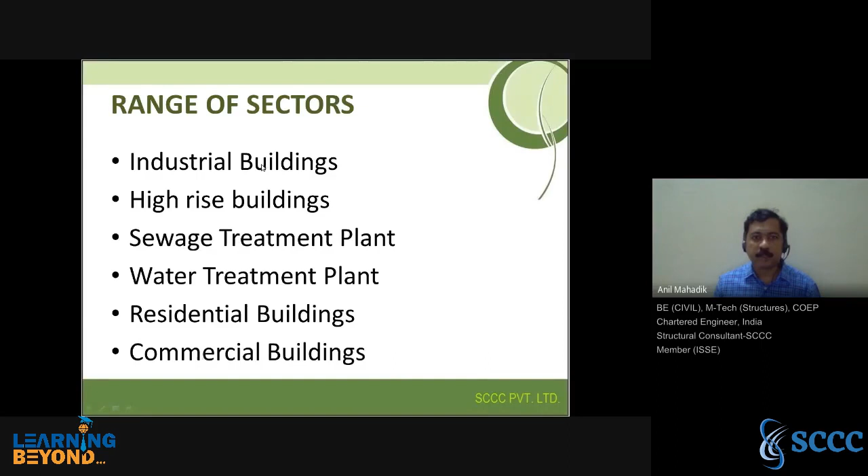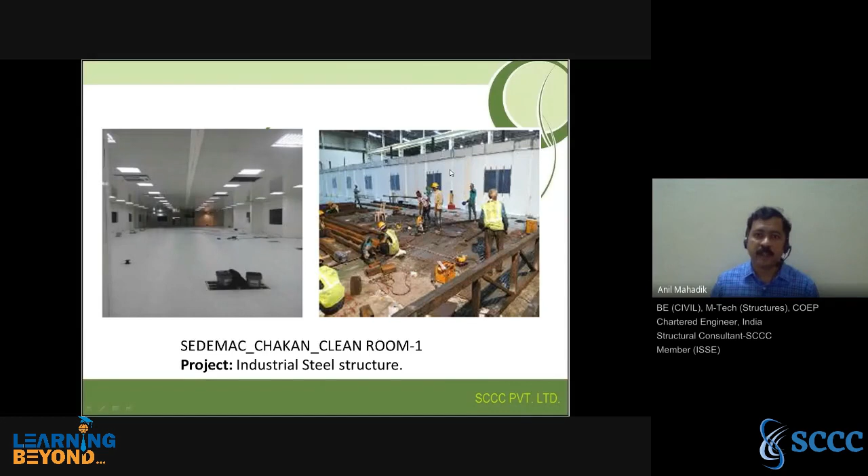These are required for electronics companies, where we have to do the interior part for the clean room structure. Clean room means a dust-proof room with an air-conditioned system inside, generally used for robotic operations. For these structures, we also need the fabrication supporting structure, which we design as well. So these are the projects we did.

This is one project where we did value engineering for the client. It was the same client, but through value engineering we saved around 25% cost for the client, and we finished the project about 20 days earlier than planned. So these are a few projects we had done.

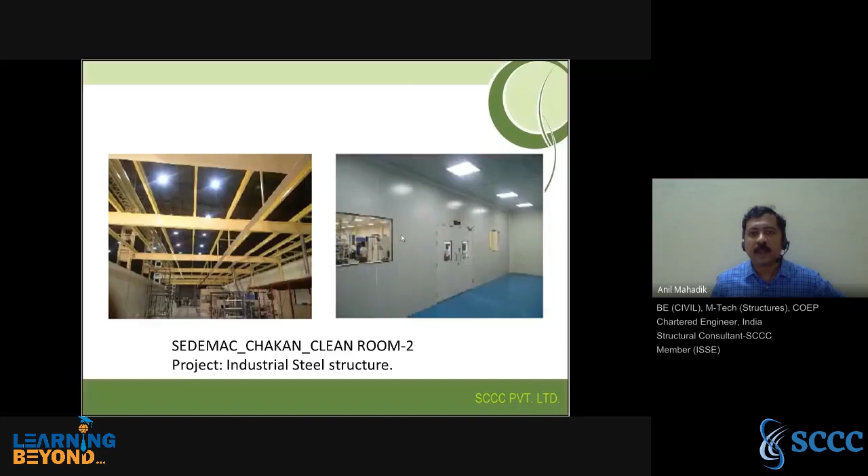We gave suggestions for strengthening and retrofitting this plant, which comprises different structures like warehouses, administration buildings, manufacturing units, foundations, etc. We gave certain solutions to the client. This client was expecting to put a solar system above the roof of the warehouse, so we gave them a solution because the roof was not able to take those loads. We provided retrofitting solutions accordingly.

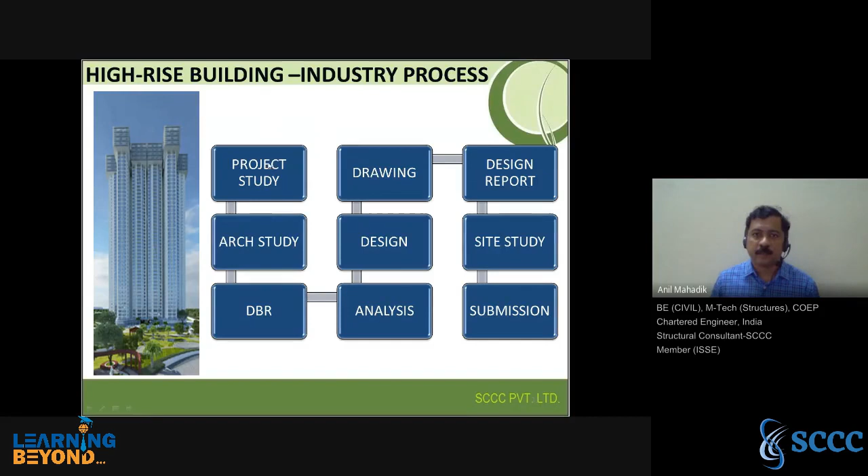Now this is the industry process. There is a certain process which is followed in the industry, so as per the industry process, we will have a training program. We know we'll just start with this project study.

First comes the project study. We have to do the project study, background information, geotechnical study, then contour survey study. This is the first part which comes while designing any high-rise building or any project.

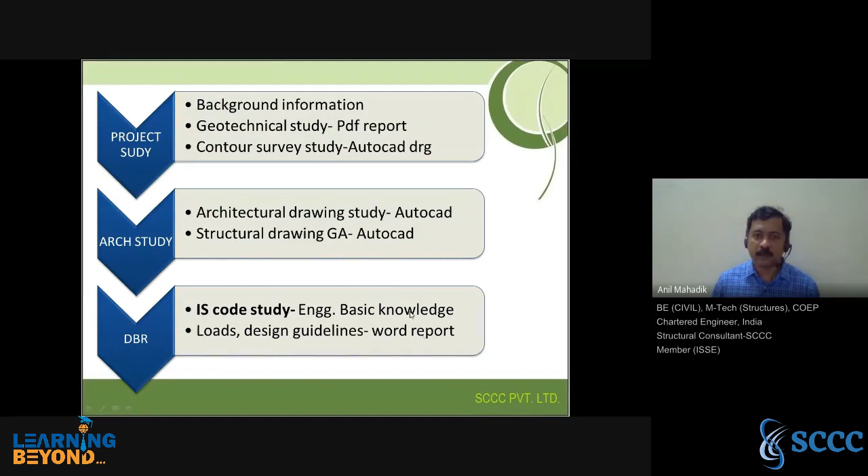Then we have to study the architectural drawings, which are generally prepared in AutoCAD. Then we have to prepare the structural drawings also, general arrangement drawings. And then we have to do the design basis report, where we study the IS code, loads, or whatever engineering basic knowledge is covered here.

Then comes the analysis by ETABS. In analysis by ETABS, we will cover gravity analysis, then earthquake methods like static and response spectrum analysis, then P-delta analysis and pushover analysis. All this will be covered in our program by ETABS.

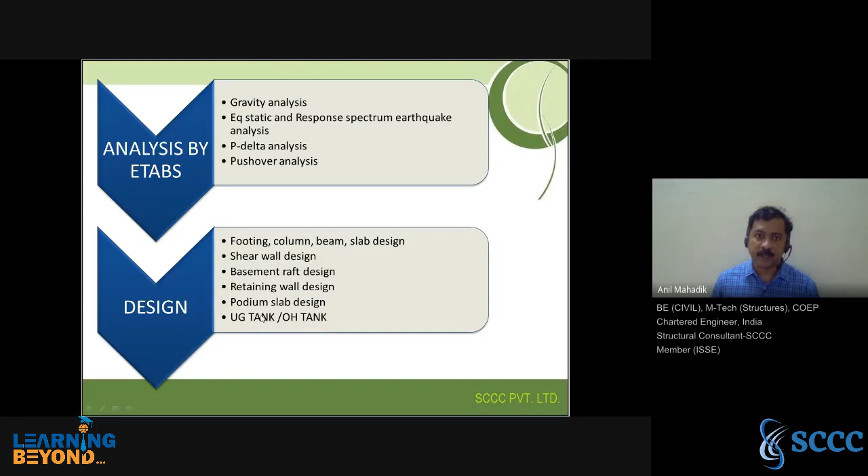Then we have to design the structure like footing, columns, beams, shear walls, basement - all these podium slabs, underground tanks. This will also be covered in the building.

Then we will have the structural drawings, practical drawings for this building. So the complete project will be done, and you will be supposed to do the project drawings also for this, including the earthquake detailing part, IS 13920.

Finally, we have to prepare the design report, calculation and design report. We will do this at the end, and also cover whatever site concerns there are - how to check the reinforcement and what are the site issues. All this will be discussed in high-rise building.

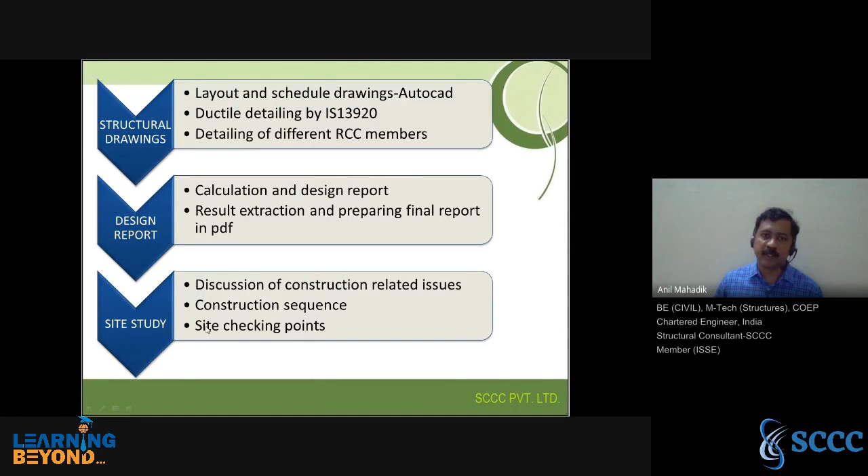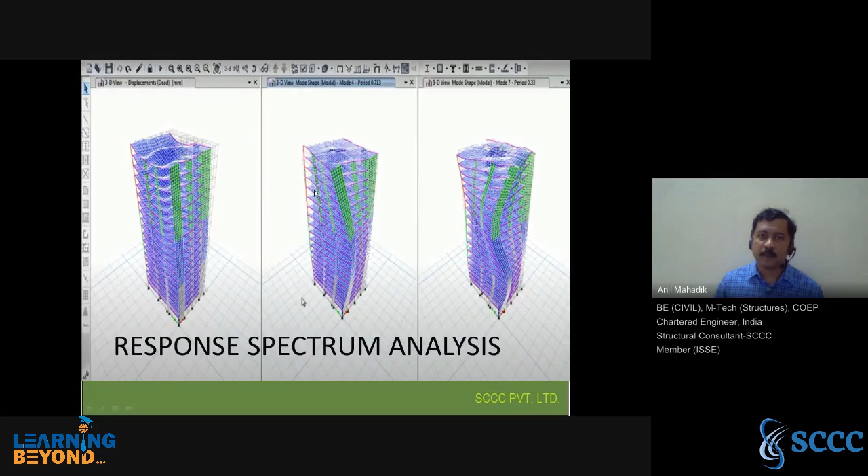This is one example of modal response spectrum analysis, which is dynamic analysis - you must be knowing this. This is vibration analysis of high-rise buildings. That part will be covered also in our program, whatever basic knowledge is required will be discussed here. So these are a few mode shapes, vibrational modes.

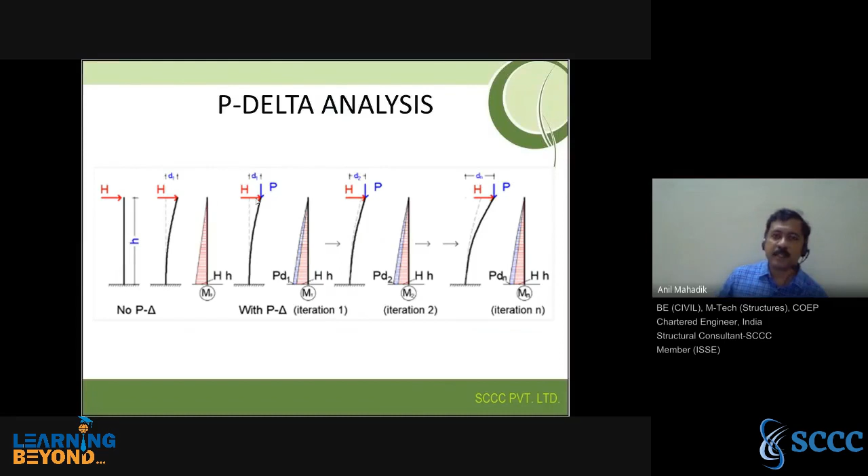And as we know, for high-rise buildings, we need to go with the P-delta analysis.

So we will cover the P delta analysis also in our program. Then we will take an example of a commercial high-rise building as per British codes, by Dubai or Abu Dhabi standard. In that also we will have the same process whatever I just discussed for our Indian high-rise building. The only difference will be that British codes are used for design of RCC elements, and UBC and ASCE is used for earthquake analysis and P delta analysis.

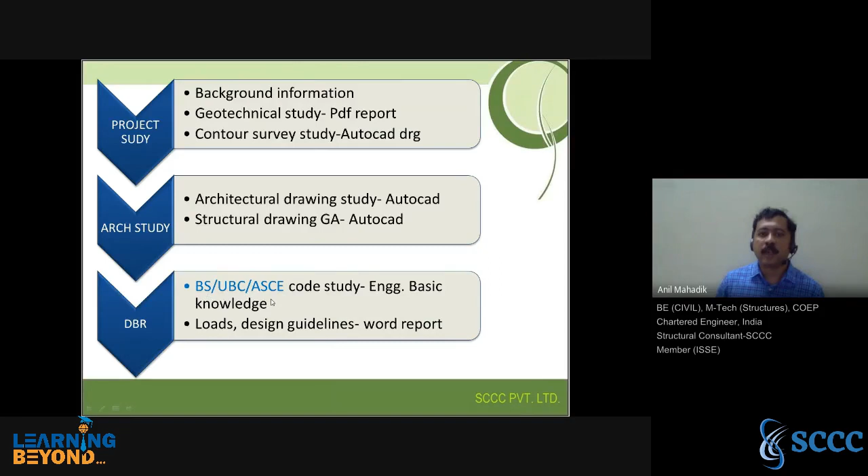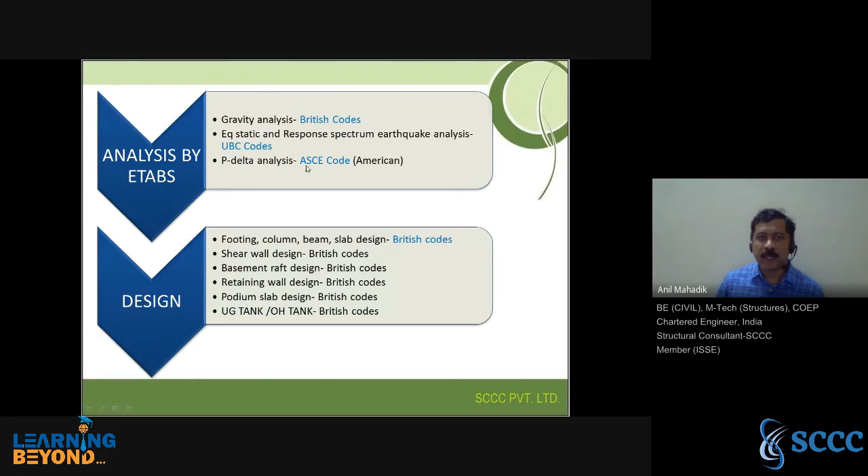So that part will be covered in our course, and we will use the ETABS software for that. The only difference is British codes and UBC and ASCE codes. So similarly here for the design, and the drawings also we will cover, structural drawings. And finally, Dubai and Muscat guidelines.

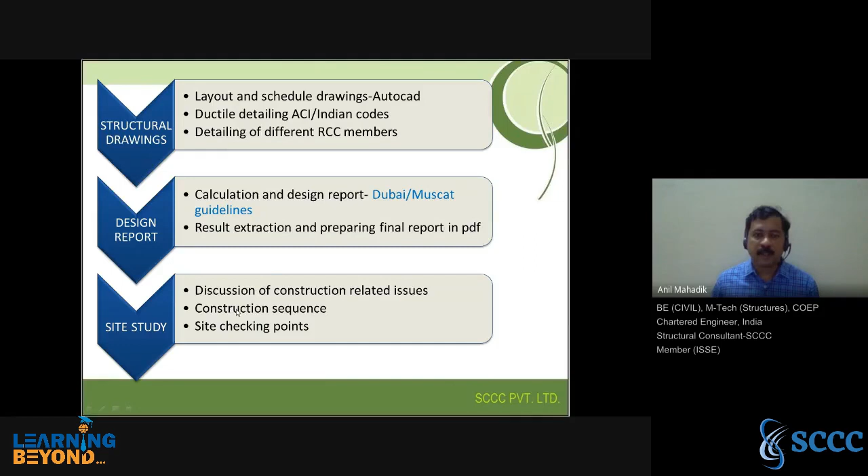These are very important if somebody is interested in Middle East projects. So this will also be discussed, how the Dubai or Muscat municipality has their guidelines and what they expect from you in the design report. So that will be discussed. And definitely site study, we will have some few bungalow projects also in our program. Then we will take the residential apartment projects also.

Second sector comes the sewage treatment plant sector, where you may be knowing that it is having different structures in this plant. So we will cover this total plant in our design and actual project. These are the clarifiers, aeration tanks, admin buildings, then pump stations. So all these structures are included in STP.

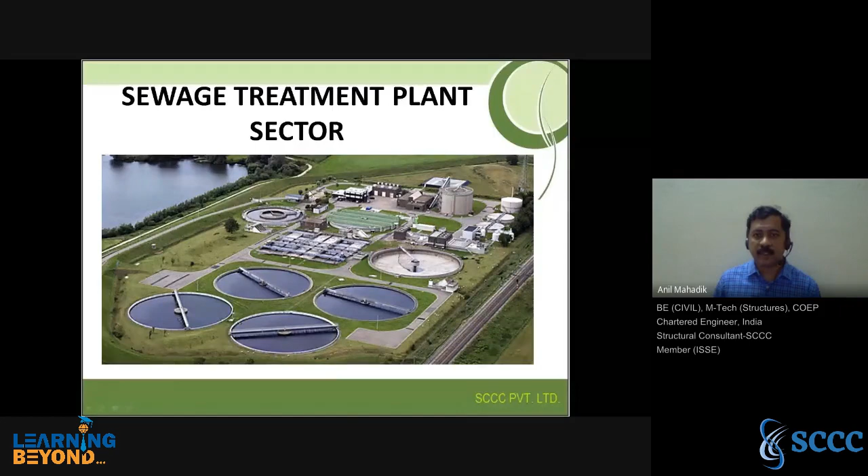So the structures are clarifier tank, we will use the STAAD software for analysis. Then aeration tank by IS code, we will use the STAAD software and Excel program for design. Then pump station, MBBR tanks, admin buildings. So this is RCC building.

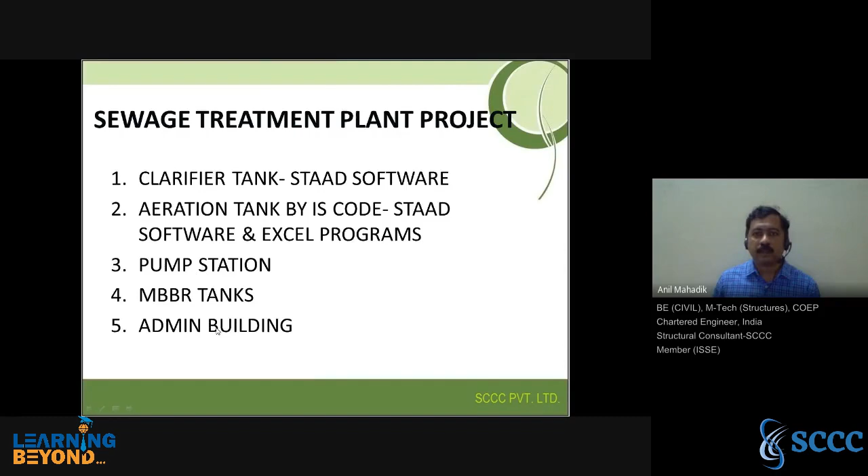So this is one example of STP. These are the clarifiers, aeration tanks, pump stations, then admin buildings around this. These are the admin buildings. So all that part we will cover in our design, drawing, analysis, everything till completion.

Third comes the ESR, meaning water tank sector, which is very important. In a water tank sector, we will follow the same industry process as we do while giving the project, the drawings and project to the client. Same is followed, where we have to prepare the DBR. We have to follow IS codes.

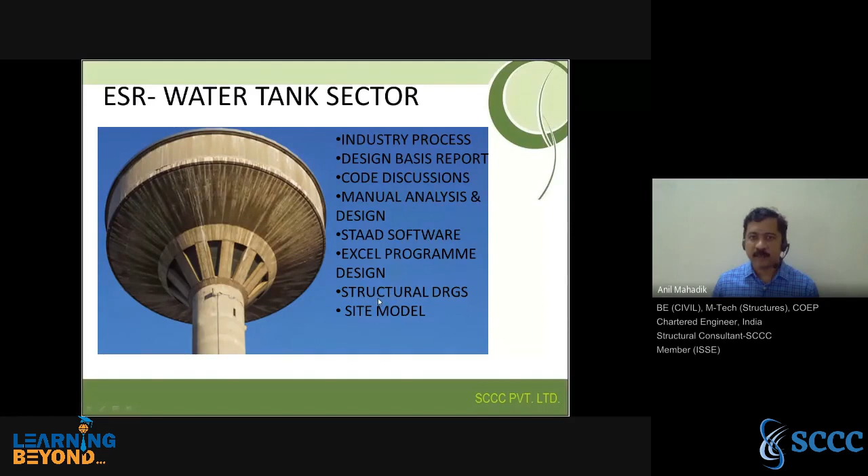Then manual design we have to do. Then we have to use the STAAD software for water tanks, Excel programs for design, and structural drawings. We will use AutoCAD and site discussions. So we will consider 5 projects in water tank: one is the circular ESR, rectangular ESR, then underground circular tanks, underground rectangular tanks, and overhead tanks on buildings.

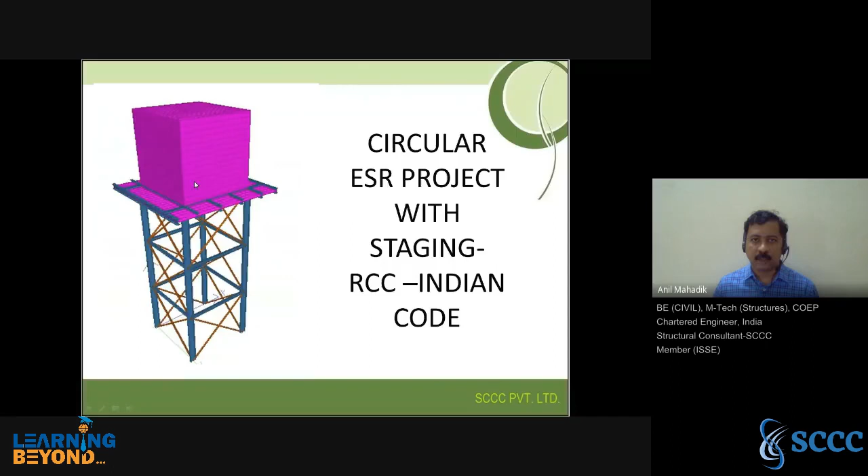These 5 structures will be covered in our water tank projects. So these are the examples of ESR: this is rectangular ESR, and this is circular ESR modeled in STAAD. This is underground and on-ground rectangular tanks, which are prepared in STAAD.

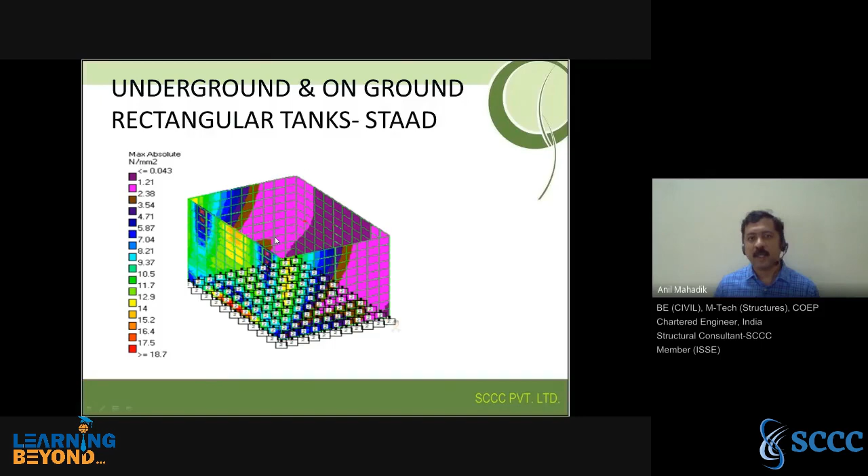Because whatever business gets generated in India and all over the world is through manufacturing and production plants. So there are different industries like automobile industries, manufacturing industries, chemical industries. So in this part also we will cover warehouse design in steel structures, where we have to focus on the steel structure.

Then we will take retaining walls. So we will take the whole plant actually, an example of a whole plant where we will do the warehouse analysis, design, drawings, retaining walls, base plate connection design. Then we will do the trimix floor also, supporting structures, cable bridges.

As we know, in companies for pipeline structures and cable supporting structures, we need cable bridges. As we know in industry, we have cranes in the industry, so for supporting those cranes we need gantry girders. So that design will also be covered. Then we will cover chimney foundation design, pile foundations, mezzanine floors.

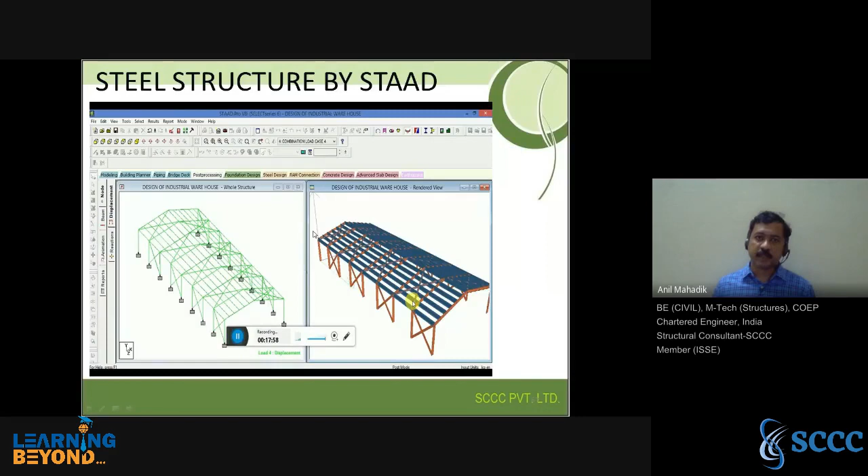So this is an example of warehouse, we will do it by STAAD. Mostly in steel structure, STAAD is used. This is one example of a STAAD project.

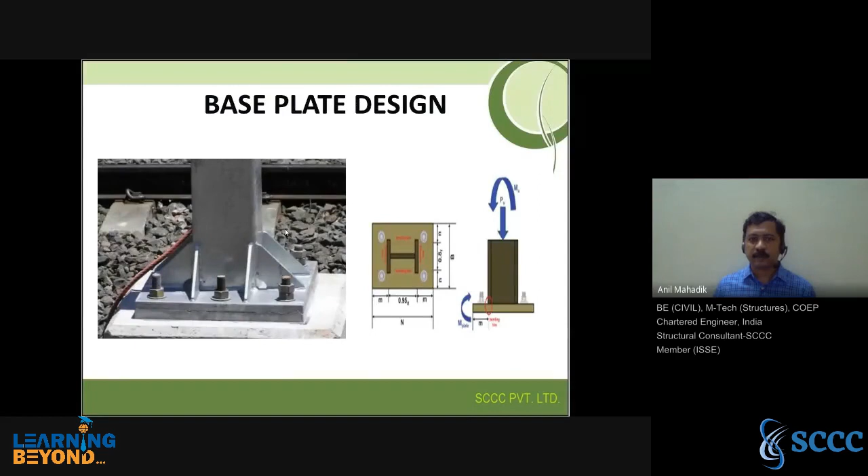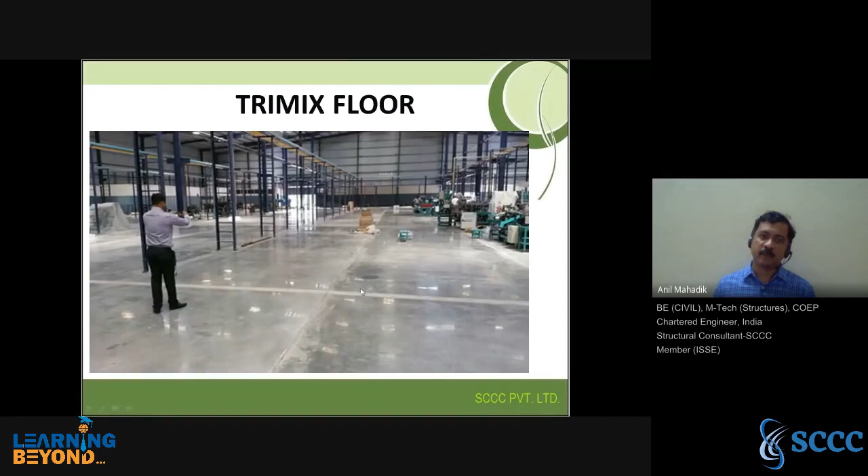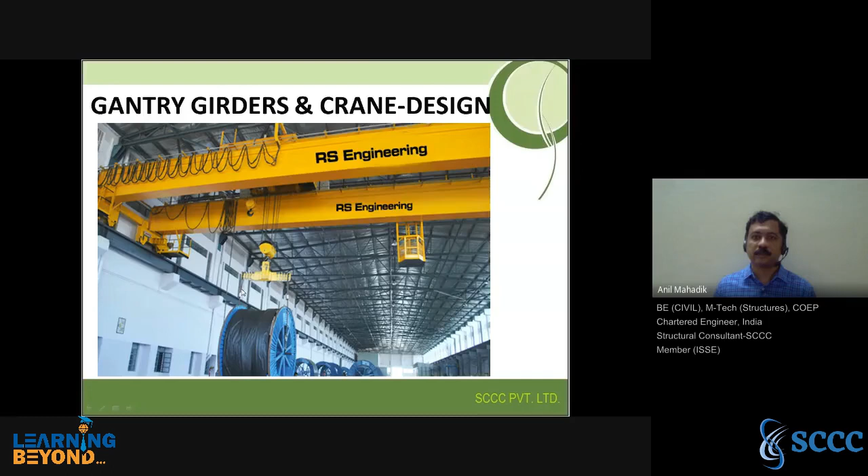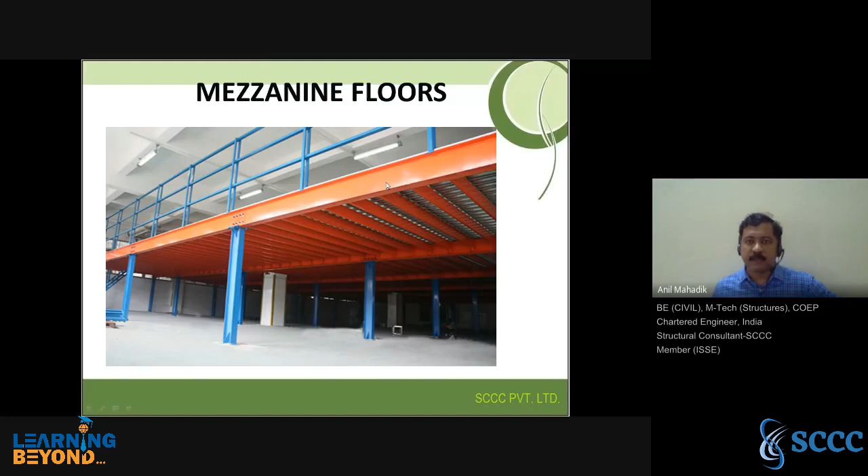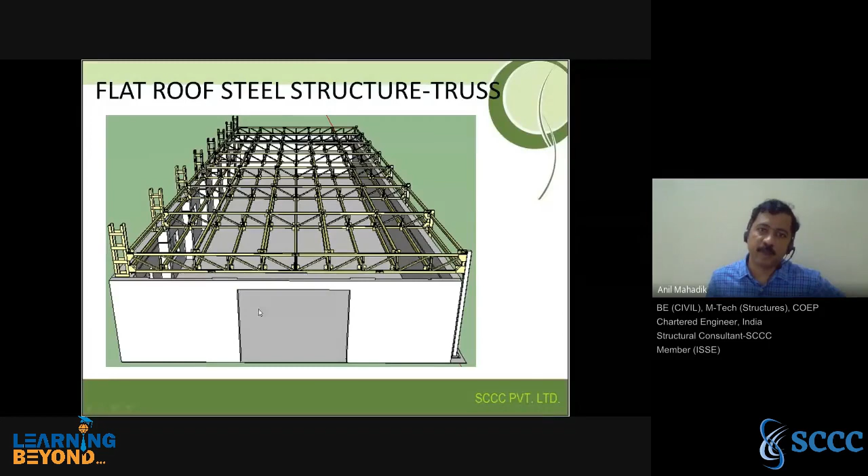This is one example of trusses. Trusses also we will cover, because many structures require trusses also. So this part also will be covered.

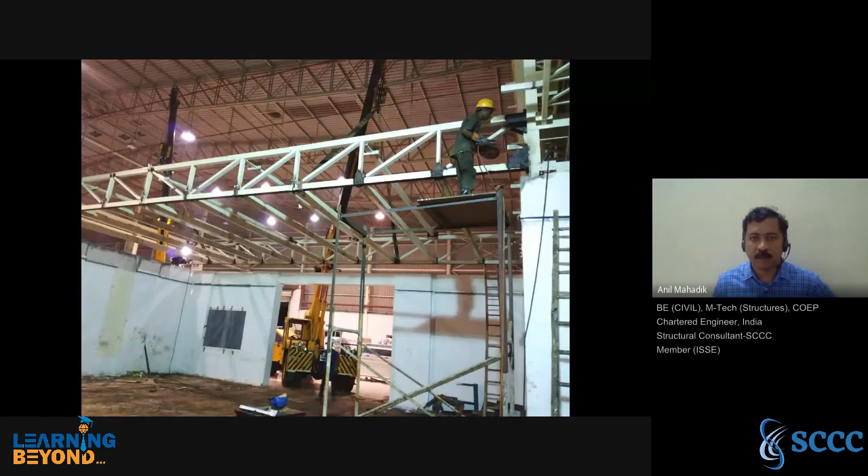This is an example of a previous project which we had done for our company, for our client. So these things will also be discussed with you.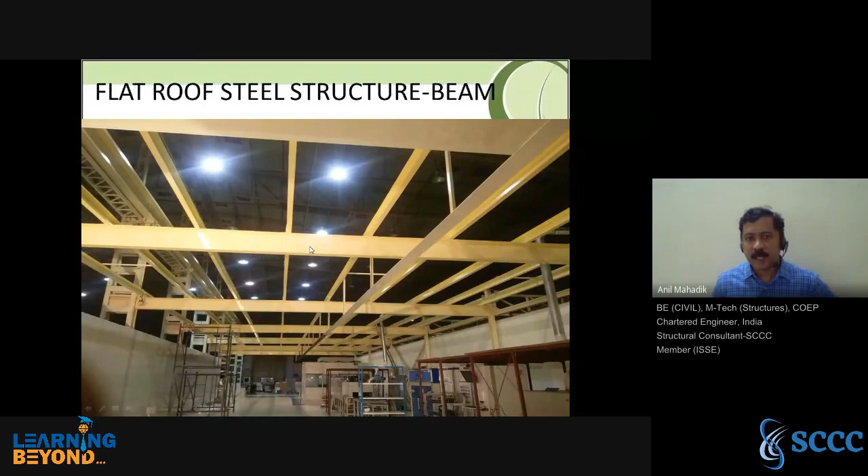These are the rolled sections, ISMB sections. So how to design and analyze the structure using ISMB sections, that will also be covered.

Now the last, fifth sector is structural audits and retrofitting. This is very much important nowadays, because in this sector buildings and industries are becoming old. So the structures are becoming old, and they need strengthening and structural audit.

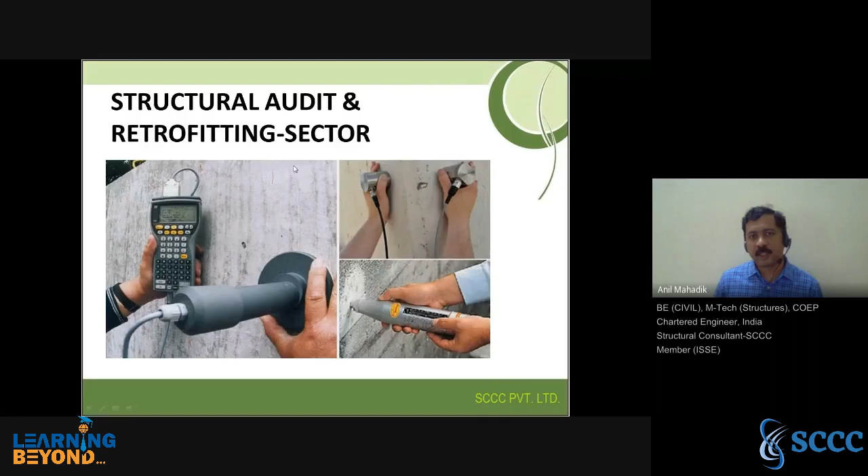So this is also an important sector, and we will take projects in that also. We will take one residential project for structural audit, and one industrial project for structural audit. Audit includes visual inspection, report, NDT tests like rebound hammer, ultrasonic test, core test.

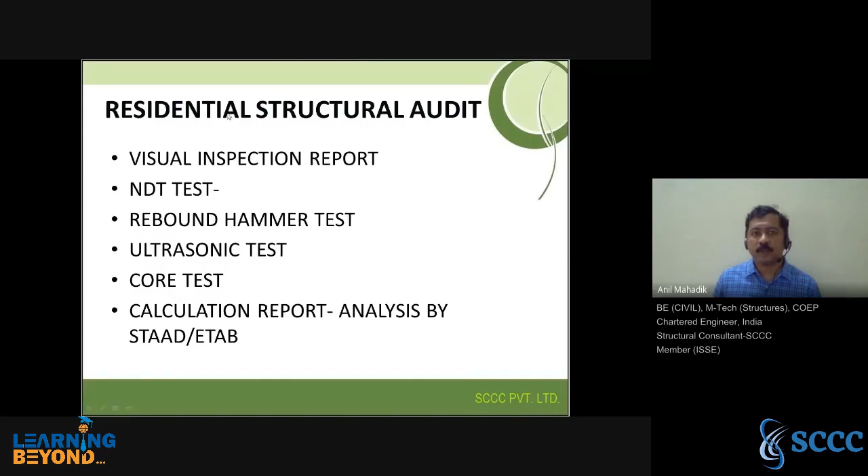Then we have to submit the calculation report to the client. For the calculation, we have to use softwares like STAAD and ETABS also. So this reporting system we will cover in the residential project and similarly for the industrial project. These two projects will be covered in our program.

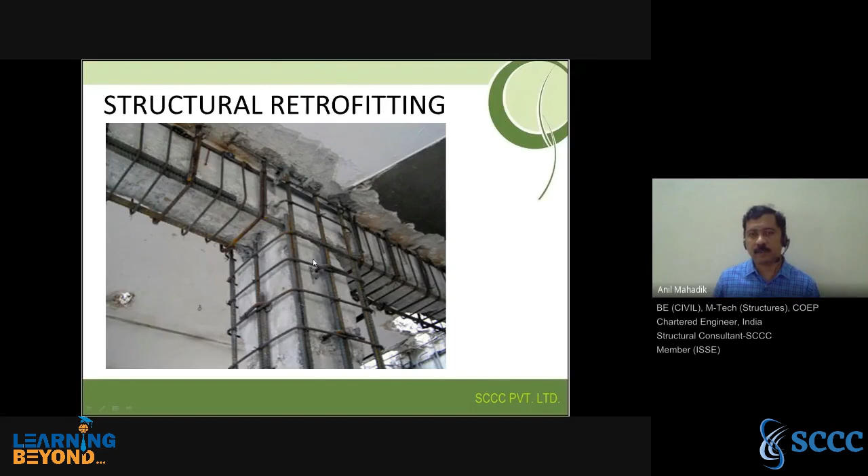This is an example of retrofitting of columns and beams. This is column jacketing, as we call it. We will also discuss this, how to do these kinds of things also - column jacketing, strengthening by steel sections also, and earthquake retrofitting also.

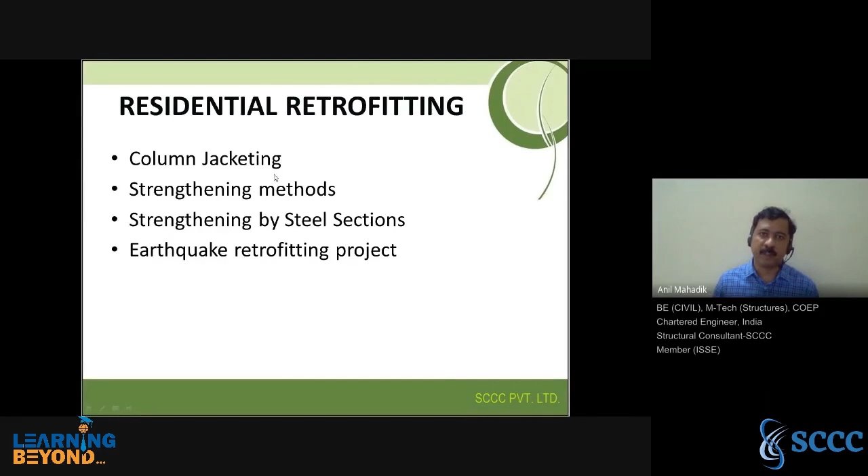This is one of the important points, because many buildings, residential and commercial, which are old, are not designed for earthquakes. So we need to retrofit them for earthquake resistance. Industry also requires retrofitting, so there are different methods of retrofitting that we will cover in the industrial project.

Now one of the important points about our training program - whatever projects I have discussed in 5 sectors require software to be used. So whatever basic knowledge of software and its application on actual projects, that will be covered. So what softwares are we going to take in our 1-year program?

There are a total of 10 softwares which we will cover. First is AutoCAD, then Revit - AutoCAD for drawing, Revit for 3D modeling and drawing, ETABS for analysis of buildings like high-rise buildings, then SAFE for foundation design.

This SAFE software is widely used in the Middle East. Then STAAD for modeling and analysis of water tanks and industrial sheds. This STAAD is also a very important software.

Then RCDC for design of RCC buildings like beams, columns, footings, everything, piles - so this RCDC software will also be covered. Excel program is also very much important. All over the world, many companies use Excel programs for design, apart from other software.

So this management software, we will apply on one small project, and we will cover that project management also. Because in the beginning, during the first 3 years, one should develop all these skills together, because he gets confidence and overall knowledge of the civil industry. After 3 years, he can think of specialization in any field.

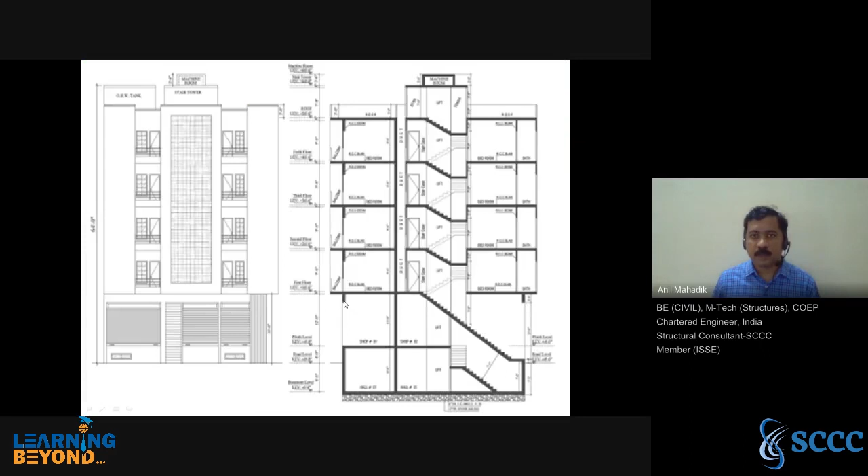So this is the AutoCAD software. These are the drawings prepared in the AutoCAD software.

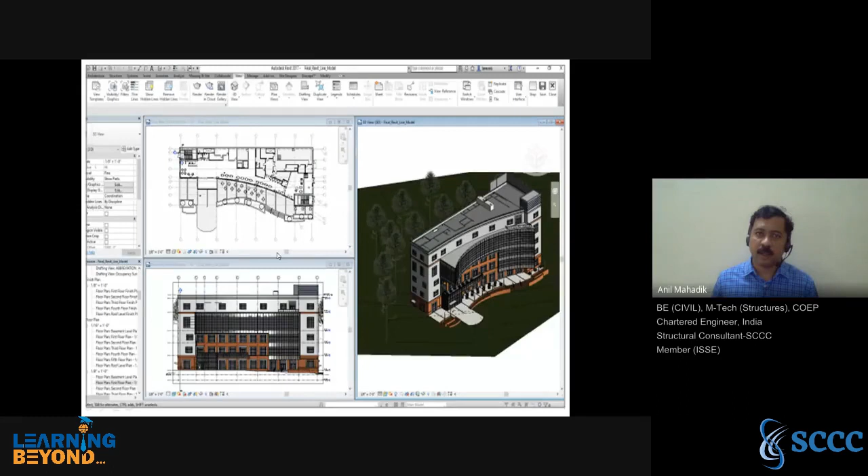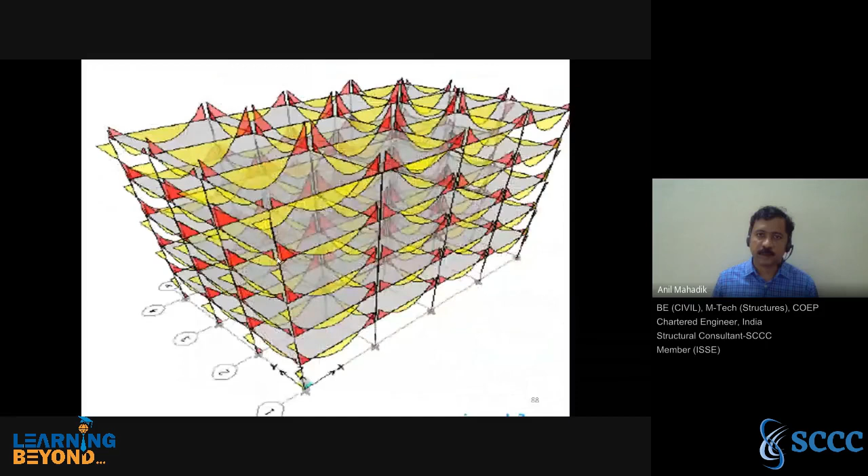This is the 3D model, and these are the 2D drawings, plan and elevations. Then there is the ETABS software, which we will cover. This is the ETABS model, and these are the ETABS results, bending moment results coming out of ETABS.

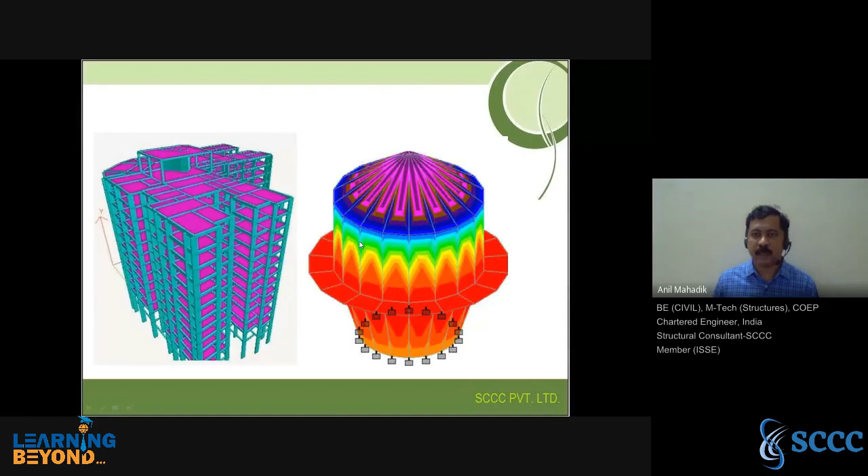Then SAFE, used for foundation design - it may be raft foundation, it may be isolated footings also. Then STAAD Pro, we will cover. These are the models - building model done in STAAD, and this is the water tank model done in STAAD. Then this is the RCDC software used for design of RCC members like beams, columns, slabs.

RCDC software also gives the structural drawings out of it. So these are the sections coming out of RCDC software. Every detail, column detailing, beam detailing, everything it can give. So these are the details coming out of the RCDC software.

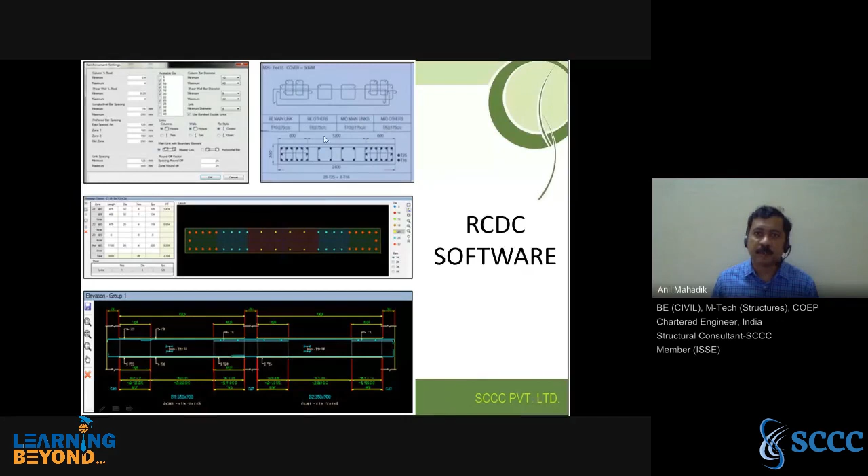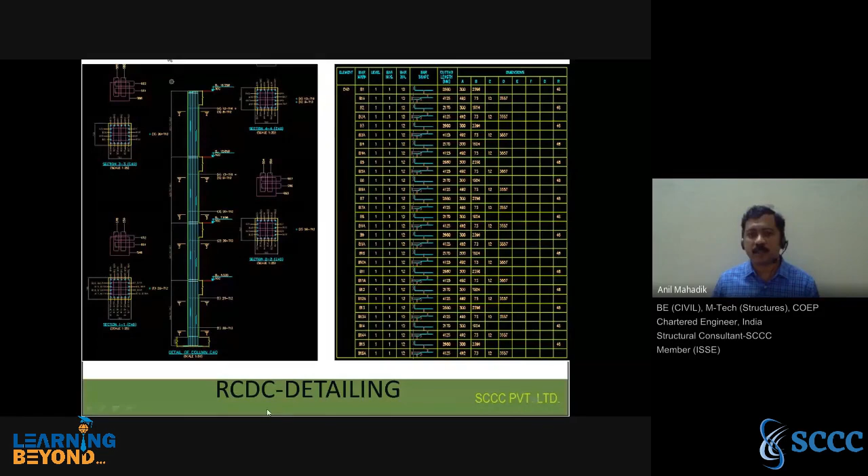Apart from these steel details, RCDC gives the bar bending schedule also. This is also one of the peculiarities of this software, because bar bending schedule is used for the shop drawings and fabrication drawings.

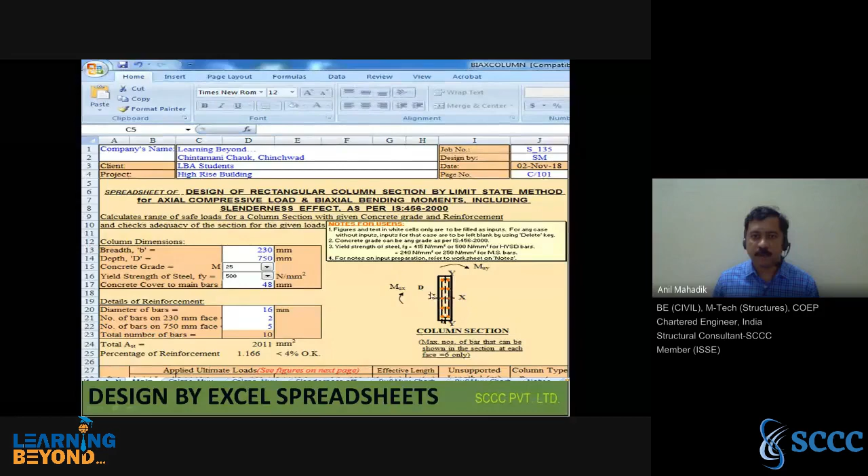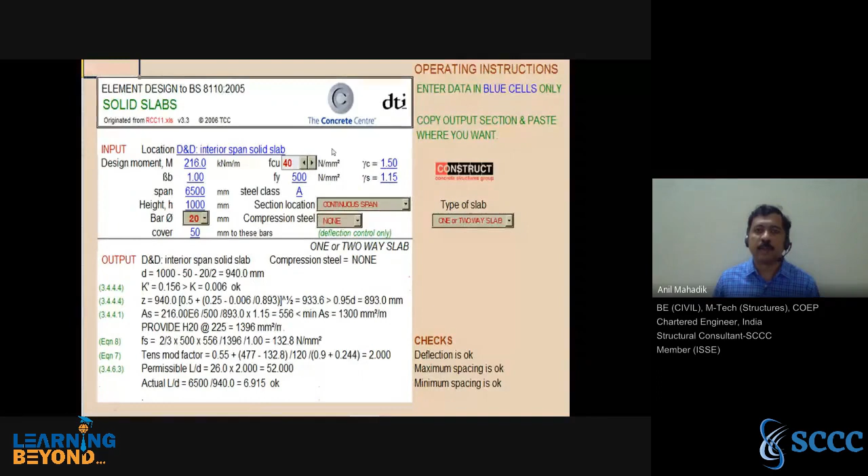These are Indian Excel programs used for the design of columns, footings, slabs, and crack width calculations. These are British spreadsheets based on British code BS 8110, used in the Middle East. So these are a few British code spreadsheets we will cover in our program.

So staircase design, columns, and retaining walls also. We used to do the retaining wall analysis and design in the spreadsheets. So these are those programs, and whatever basic knowledge is required for this designing, we will cover that also.

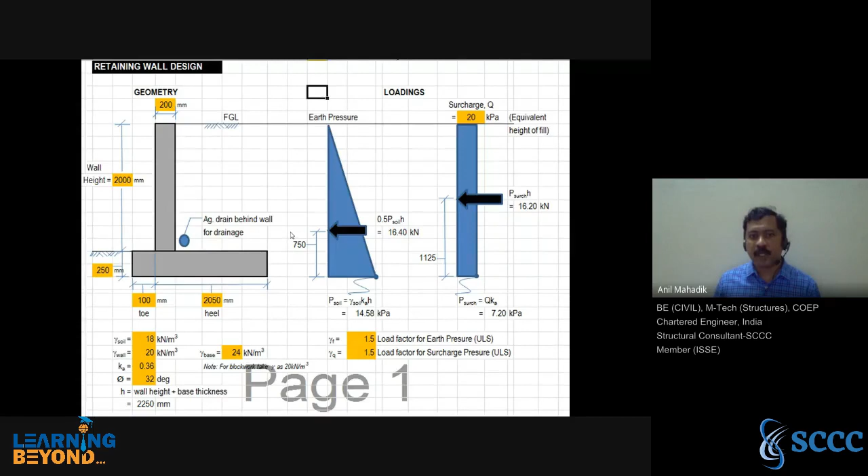Many times the concepts are not yet clear for people. We found this actually, we had taken around 500 to 600 interviews in our company over the past few years. Many times we have seen that people are not having confidence because they are lagging in their conceptual knowledge. So that conceptual knowledge, we will guide you through, how to develop it. That will improve your confidence through this program.

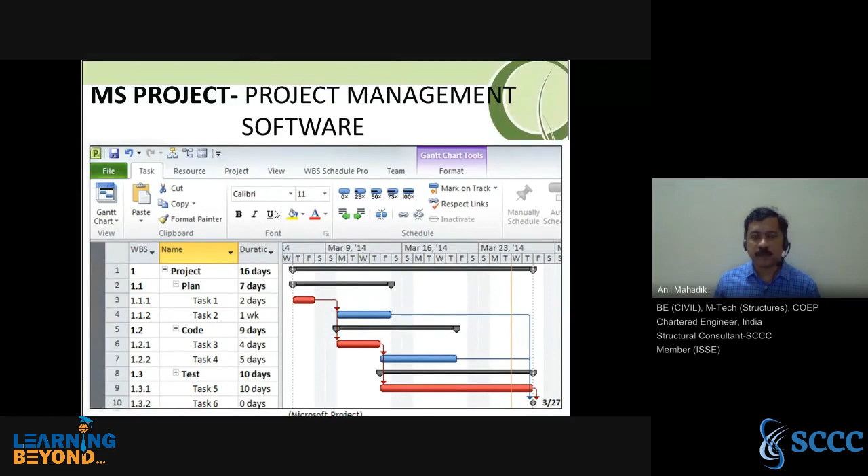So these are a few spreadsheets. This is MS Project Management Software. We will cover this also in our program.

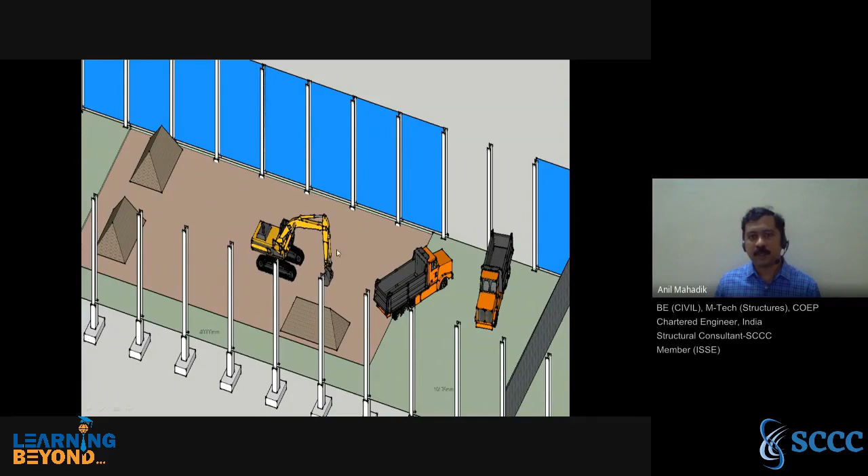This is also one of the projects we did for a POSCO client, where we did the total construction sequence in Google SketchUp - how the work will start, how the excavation will be done, how the structure will be erected. Everything was in construction sequence. Whatever comes, we had done the Google SketchUp model for that.

Now we will discuss the benefits of this program. The training will be given by experts, and there will be a supporting team to guide you through the projects. So you are getting an opportunity to work with industry experts. All-round experience will get developed.

We are covering 5 sectors which are very important. This all-round experience along with conceptual knowledge will help you get jobs or grow in your job if you are already working, in a multiplying effect - around 10 times that confidence and experience will get boosted.

At the end of the training program, we will issue an experience certificate, and we will prepare the experience report, which is called the IPD. This experience report will be prepared on UK standards. In UK and other countries, they prepare experience reports called IPD. So that we will prepare at the end of the course.

In the beginning, you will be given an admission and appointment letter from the company. You will get around 4 to 5 years of experience knowledge in 1 year.

As you have seen, all these sectors are covered. So definitely this person will get all-round knowledge, because if you look at jobs around us, in one job we cannot get all that knowledge. It requires around 5 to 6 years or even more to get all-round knowledge, because it is very difficult to get all sector knowledge in one company or any company.

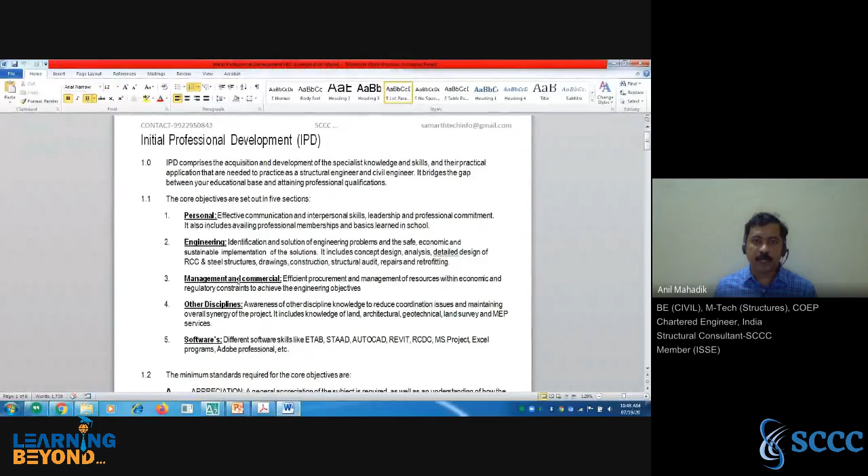And in engineering, our projects will come. In personal communication skills will come. In management, MS Project and BOQ estimation will come. And in software, all softwares will come.

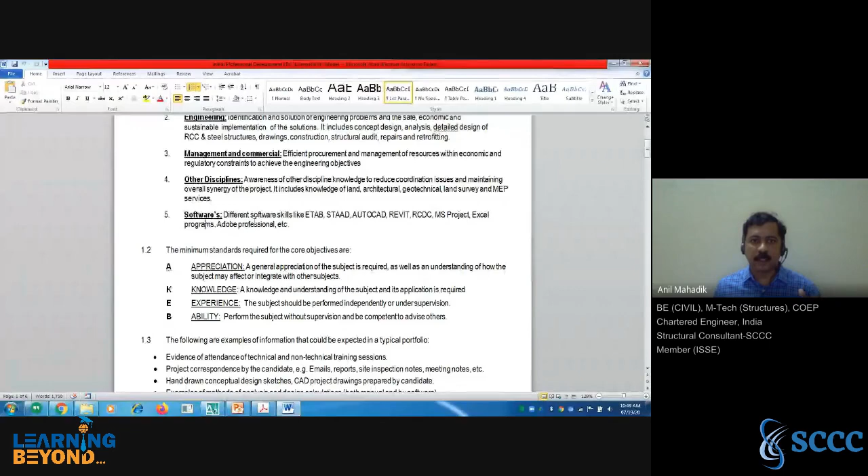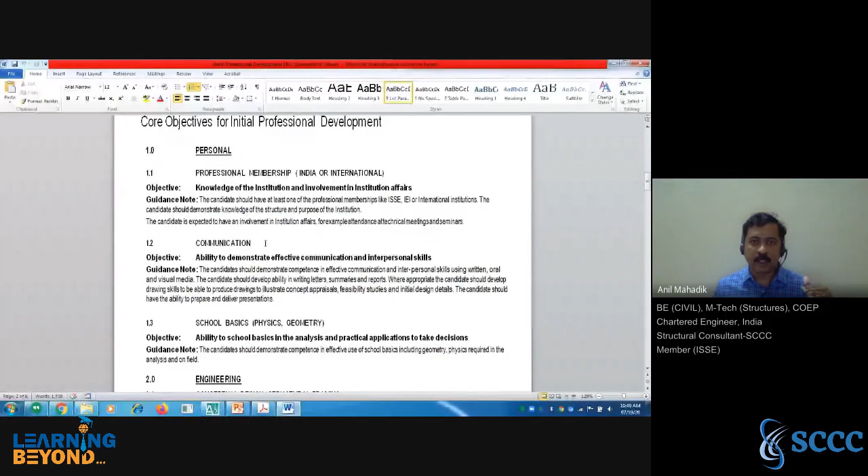So these are certain guidelines given by the UK. In this way, the person is evaluated, which helps to get jobs, or helps to grow in the job if he is working currently. So these are certain guidelines, methodology and evaluation parameters, and based on these, we will prepare the report at the end of the year. These are some guidelines made on the basis of UK standards.

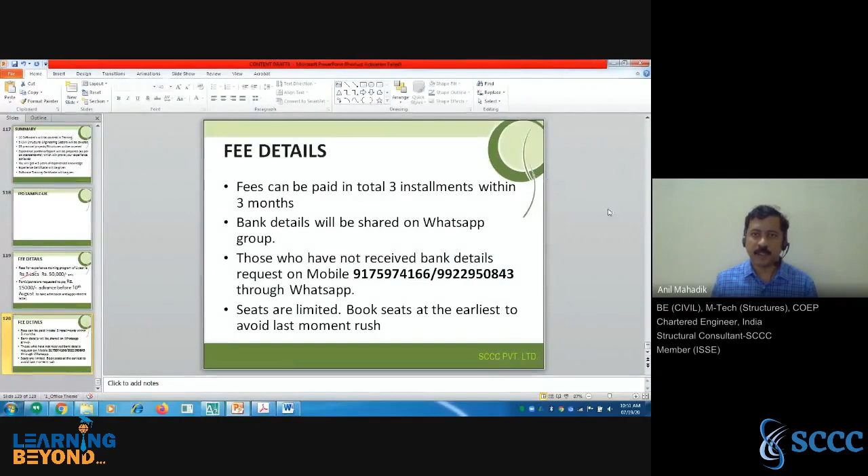So this concludes my session. And if you have any questions regarding this, I'm very happy to answer your questions.

Session timing - if there are trainings like software trainings or any basic knowledge trainings, it will be conducted in the evening. It will be a 5 day week, from Wednesday to Sunday, so Monday and Tuesday will be holidays, so that working people can join it.

Will we get any study material? Yes, definitely, this requires study material also. You will get study material, you will get videos also, wherever required. Study material we will give you, because to complete the project you need certain inputs also, so that will be shared with you.

Sir, Bhavesh Mishra here. Okay.